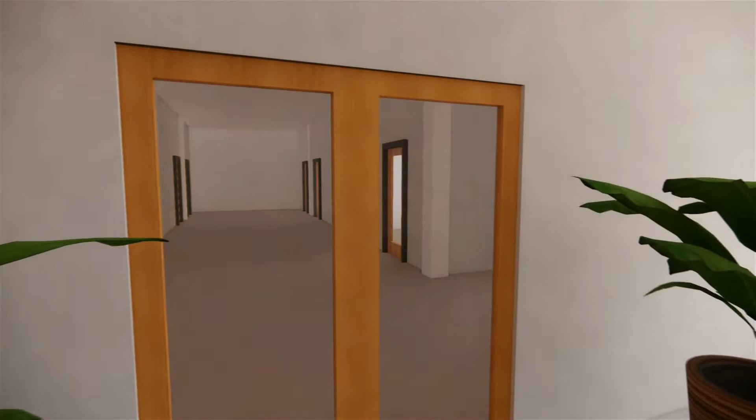For the pre-design stage, we have to prepare a project brief that incorporates sustainable and carbon reduction targets or goals and strategies, such as reduction of carbon emission. This will also include the green budget estimation.

We also have to develop a plan for integrated green features under the Integrated Design Process (IDP), which can be done through an eco-charette, addressing complicated issues. The implementation of IDP and assembling an integrated design team will also be carried out.

The design team will consist of architects, client, consultants and other project members. The assessment of environmental and social impact of the project will also be done. We also take input from a facility manager as early as during the design stage.

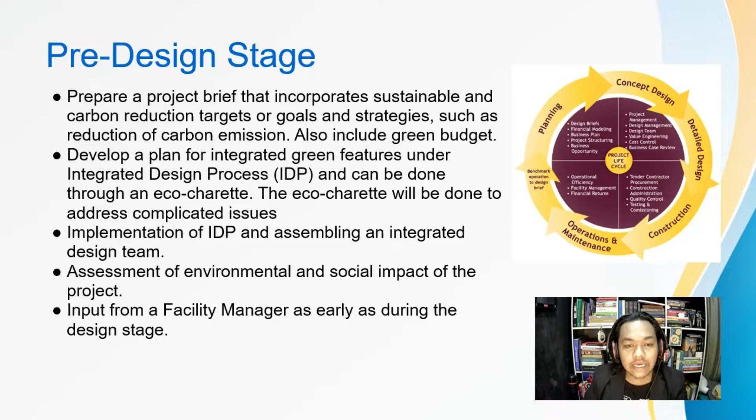The next criteria is energy performance impacts. Some of the design criteria include the use of an energy efficient lighting system, reduction of 6 watts per square meter in OTTV from the baseline, installation of automatic sensors in common and circulation areas, more than 30% of the building design to receive natural lighting, providing renewable energy of 3%, improving energy savings by 57%, and the installation of individual sub-metering.

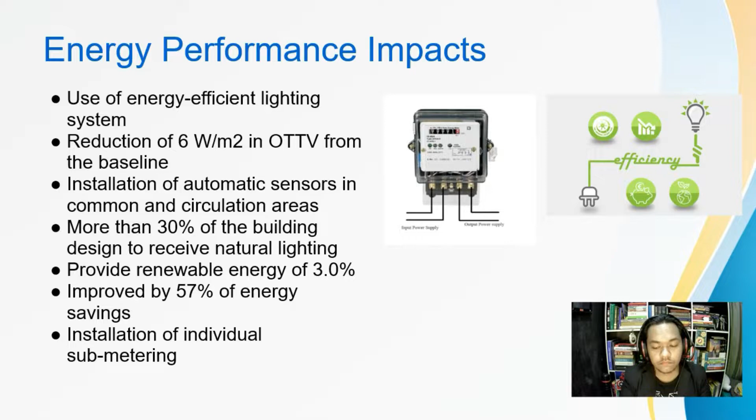The next criteria is social and cultural sustainability. This aspect emphasizes the importance of safety for construction workers and also the safety of guests and customers of the building. The design will prepare disabled-friendly amenities based on the standard requirements and guidelines of UBBL, MS 1183 and other guidelines. 60% of occupied building spaces have a direct line of sight through vision glazing.

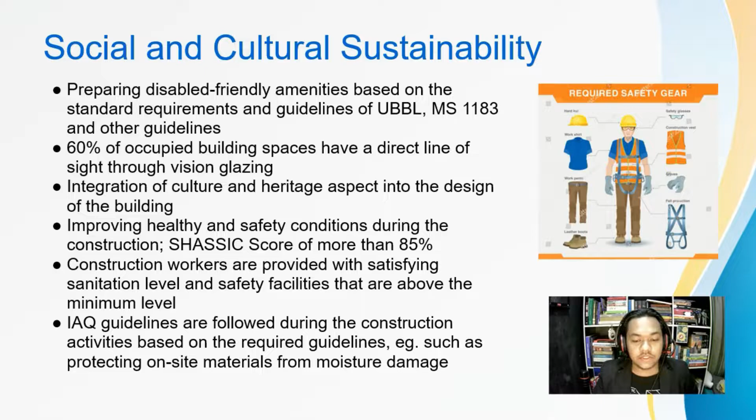The integration of culture and heritage aspects into the building design, improving healthy and safety conditions during construction, and achieving a SHASSIC score of more than 85%. Construction workers are provided with satisfying sanitation levels and safety facilities above the minimum level. IAQ guidelines are followed during construction activities based on required guidelines, such as protecting on-site materials from moisture damage.

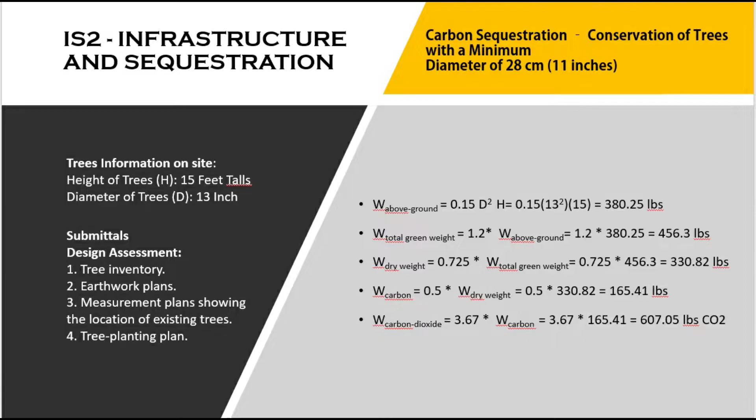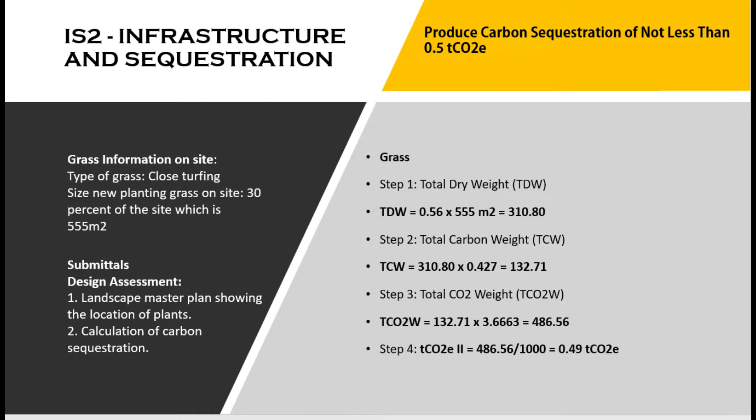Next, this project will fulfill all three criteria: conserve and restore including planting new vegetation on approximately 30% of the site area, integration of shaded trees within 5 meters from the building perimeters, and produce carbon sequestration of not less than 0.5 T CO2e. Based on the calculation shown on the slide, this project has achieved 0.49 T CO2e.

Next, this project will also implement an environmental management plan and conduct a complete erosion and sedimentation control plan. The document that needs to be prepared is a project environmental management plan.

This project will also implement a stormwater management plan that prevents the post-development peak discharge rate and quantity from exceeding the pre-development peak discharge rate, since the site has existing imperviousness of approximately less than 15%. This project will also implement the Urban Stormwater Management Manual for Malaysia to fulfill stormwater management factors that reduce impervious cover and promote infiltration using acceptable best management practices.

Lastly, this project will implement natural strategies by reducing hardscape and increasing landscaping area using natural swales. Next, this project site also is within 400 meters of a public bus stop, and this project provides covered pedestrian walkways to ease access to public transport elements.

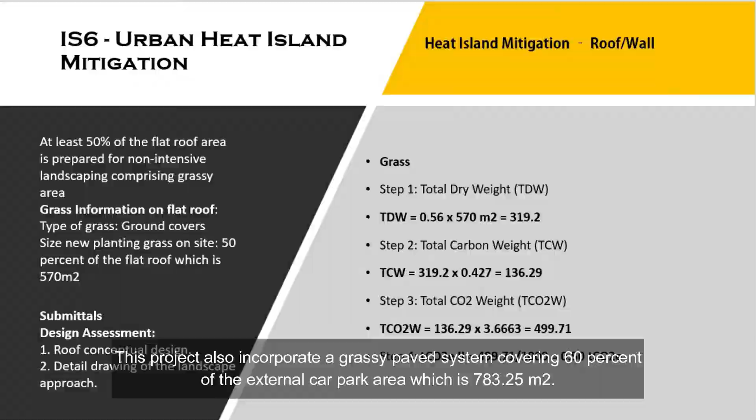This project also incorporates a grassy paved system covering 60% of the external car park areas, which is 783.25 meters square. Next, this project also implements proper timing of erosion and sedimentation control strategies with respect to rain and confines construction activities to pre-designated areas.

Proper implementation of staging and spill prevention plan, and implementing effective erosion and sedimentation control to prevent erosion. The item or documents such as erosion and sedimentation control plan and drawing required is prepared to show the commitment to implement these strategies. Lastly, this project will fulfill all criteria in the aspect of environmental management practice.

For the next criteria, which is demolition and disposal factors, this project provides 3 product agreements of any building component sourced from manufacturers that have a buyback program, such as kitchen cabinet, air conditioning and lighting system in the building. Declaration tender specifications will be provided to show the commitment to implement these strategies.

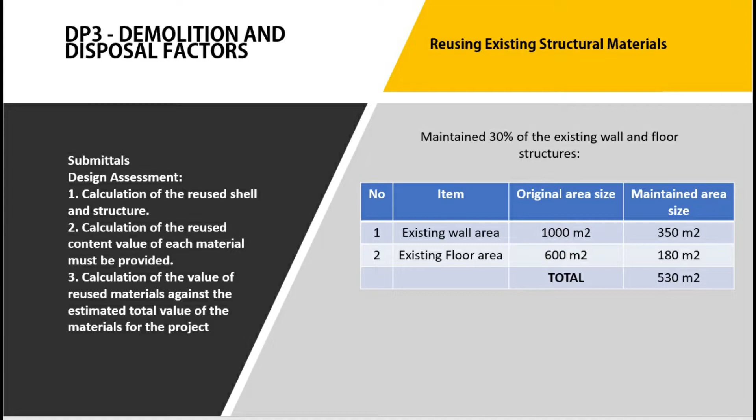Next, this project also will maintain approximately 30% of the existing area for the wall and floor to reduce waste and construction costs. Based on the calculation shown on the slide, the total maintained area is 530 meters square, consisting of the existing walls and floor. The overall point for this criteria is 3 points.

The last criteria, which is sustainable and low carbon initiative, this project will provide one key member of the project team to be a MyCrest facilitator by providing proof of appointment.

Lastly, this project will implement 3 innovations such as carbon sequestration, new planting, provide renewable energy of 5% of the total building electrical consumption, and improve energy saving by 69%. The overall point for this criteria is 5 points.

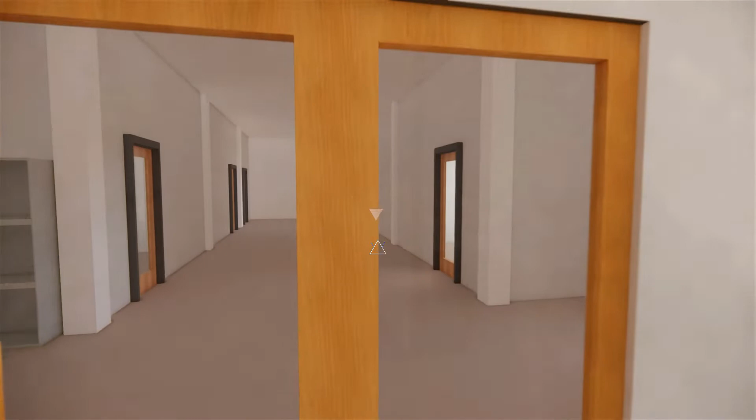In order to fulfill the requirements of MyCrest, there are several changes to be made. As this is an air-conditioned building, we have designed a mechanical ventilation system to maintain good quality of indoor air. Not only that, we should locate the non-smoking signs at visible places to ensure compliance with regulations through restrictions on smoking in buildings.

Apart from that, we would provide a designated area for smokers outside the building, which is 10 meters away from the main entrance. Low VOC materials for paints and coatings will be applied in order to reduce the quantity of indoor air contaminants that are odorous, irritating, and harmful to human health.

We also have installed an indoor monitoring system with carbon dioxide sensor to ensure the carbon dioxide levels are maintained at less than 1000 ppm. The scoring for the criteria of occupant and health is 8 out of 10 points.

For the criteria of lowering embodied carbon, the scoring is 26 points out of 34 points. The criteria of water efficiency factors has gained 11 points out of 13 points.

The air conditioning system in the building has to be changed to one which is environmentally friendly in order to fulfill the greening stage. By changing the air conditioner, the cost being saved is 142,947 ringgit and 60 cents based on the calculation.

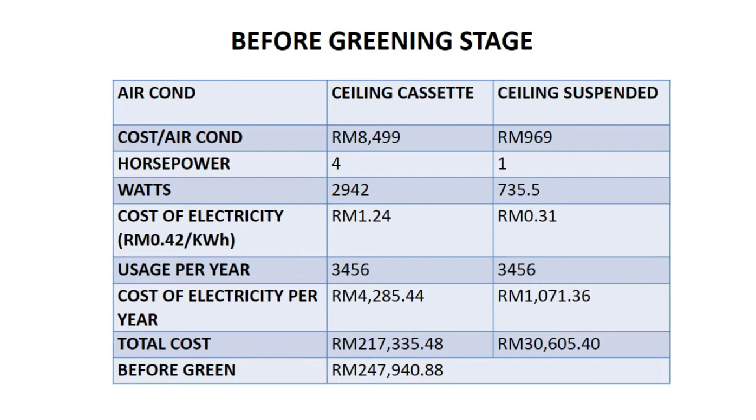Now we'll take a look at the analysis of the total building cost. Before the greening design, the total building cost is around 4,550,000 ringgit. However, after the greening process, the total building cost is around 5,460,000 ringgit. While this may seem like a loss of profit to the client, the return on investment for the building is around 20%.

The building operation and maintenance cost will save around 1,022,000 ringgit. Before the greening process, the total monthly cost of operation and maintenance is around 3,785 ringgit. However, after the greening process, the monthly cost of operation and maintenance is only around 2,081 ringgit.

The annual cost for the O&M before the greening process is around 45,423 ringgit. However, after the greening process, it is only around 24,983 ringgit. The total cost during the whole lifespan of 50 years is around 2,271,180 ringgit before the greening process.

However, after the greening process, the total cost during the whole lifespan is around 1,249,152 ringgit. It manages to save over 1,022,028 ringgit.

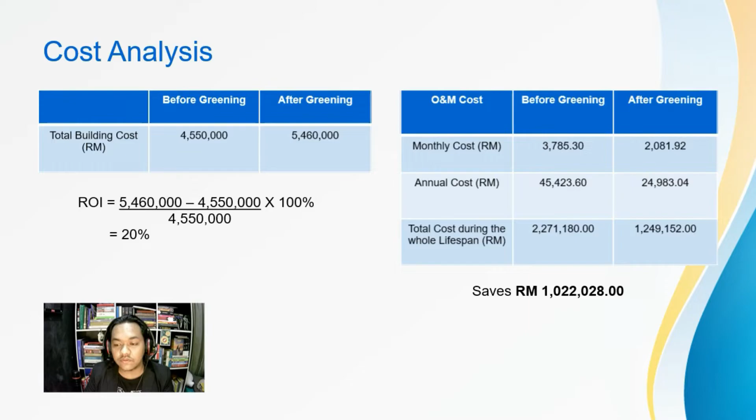Based on the MyCrest scorecard, before the green features are applied during the design stage, the total score achieved or the total points achieved are 76 points out of 183 points. The percentage is around 41.5%, which is equal to 1 star.

The building managed to achieve the level of certified MyCrest building. However, they only achieved 1 star for the green features and also the sustainable features.

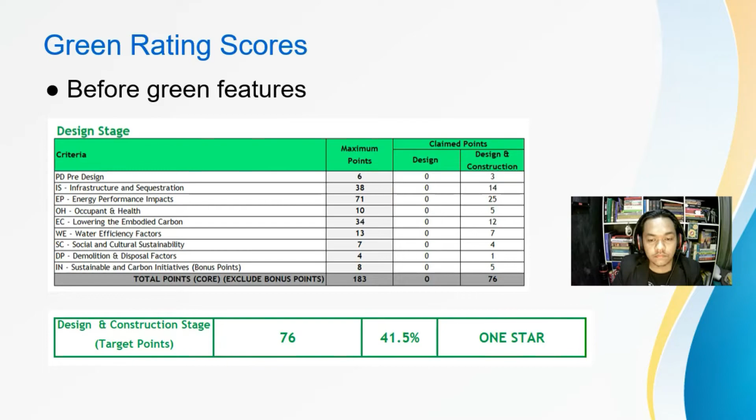However, after the green features have been applied during the design stage, the total points or score achieved are 158 out of 183 points, and it manages to achieve 86.3%. The 86.3% is equal to 5 stars of the green rating score for MyCrest. 5 star is the highest point or rating for MyCrest building.